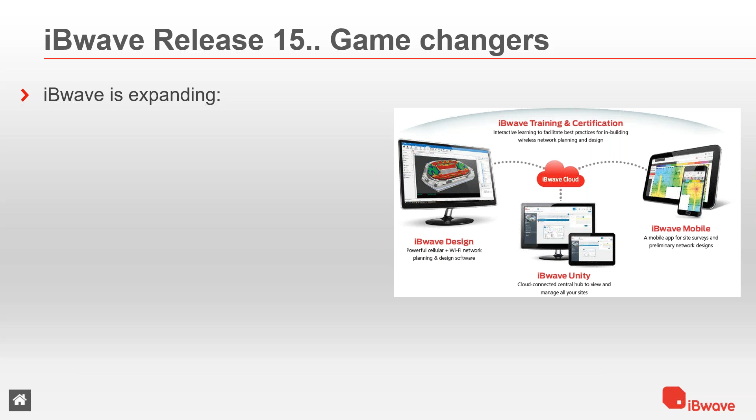But in release 15, we are launching a number of other products. So we are expanding, and this might be of interest for you. The first one is the subject of today's webinar, which is public safety. This is where you can plan, design, and propose public safety networks for the governments or companies you may be servicing.

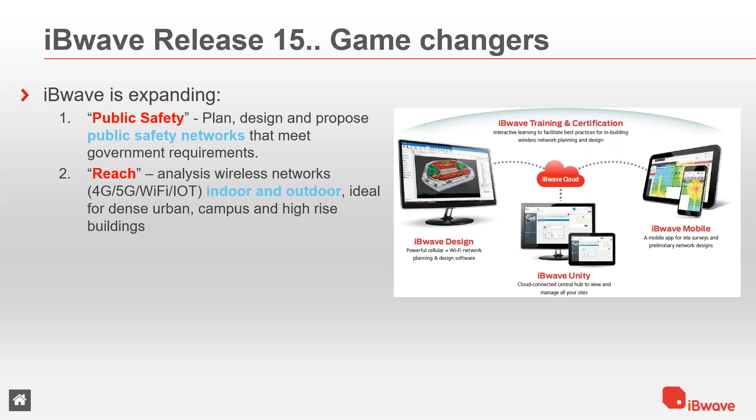The next product, which we can follow up in later webinars, is Reach. This is the first time iBwave is going outdoors. Not only do we design for indoor, but you can also design indoor and outdoor to take into account pollution or coverage from macro or small cells outside the building. It's more of a cellular Wi-Fi IoT solution, but it's very exciting for those designing dense urban networks, campus networks, or high-rise buildings where you have different interference and coverage at different heights. I encourage you to try this out, because I've been waiting for this myself for a long time.

Survey is the other one we're branching out into. iBwave traditionally has been a design product, but as of yesterday, we're moving out into outdoors as well as surveys. For the first time, you can do design and measurements within the same product. You can go onto site, draw a floor plan, take measurements, and do the design all on a tablet in one shot. Again, I encourage you to try this out.

It's really exciting. The last one to mention for this release is Uplink. This is the first time - traditionally, most of our design has been focusing on the downlink, which for the first users of the internet has been more for consumption of whatever's on the internet. But now that we've got Internet 2.0 and even 3.0, we are focusing on both uplink and downlink, because posting videos and so on is just as important as receiving them. So it's good to design the network to make sure it works in both directions.

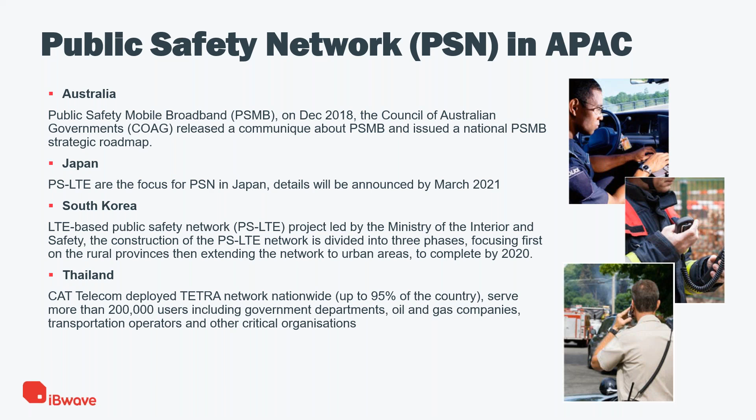So how about iBwave? What is the iBwave public safety solution? iBwave has a dedicated version of software called iBwave Public Safety. It's actually focused on planning, designing, and proposing public safety networks that meet government requirements. Overall, iBwave provides a suite of products and trainings for planning and design, aimed at public safety networks.

The first one is iBwave Unity. It's a data sharing platform, a cloud solution to allow us to share the design and planning of the buildings, and to allow the project manager or higher management to understand the progress of the project itself. Unity is also able to share within government agencies to allow them to download and know the project compliance.

The second one is iBwave Public Safety. This is the major product I'm going to demo and talk about today. It's installed on our PC to allow us to do planning and design.

Last but not least is iBwave Mobile. This is a mobile app installed on an Android-based tablet or even a smartphone, allowing us to do walk tests and data collection. The latest version allows us to do single band cellular surveys, since public safety may only operate on a single band, maybe 450 or even 800 or 900. And it's able to integrate with third-party collection tools. So this is the family of iBwave public safety solutions.

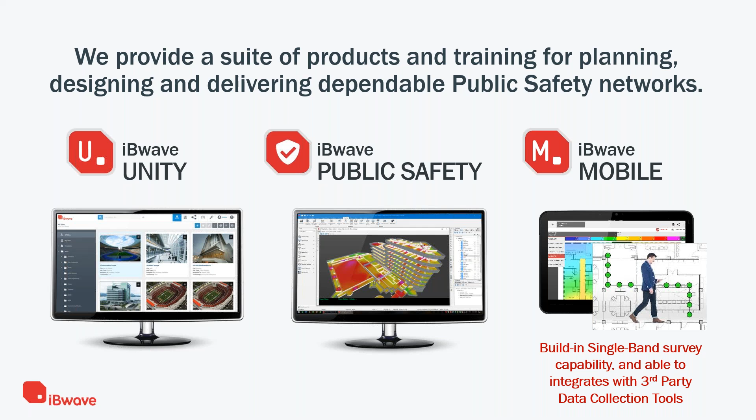We continue to: what are our considerations for public safety? What are the challenges and the things we need to overcome when doing public safety design? Basically, public safety networks, especially in-building, always run on low frequency, such as 450 or 800, be it running on TETRA or LTE.

Generally speaking, large buildings of more than 20,000 square meters might require a dedicated public safety system inside the building. For smaller buildings, it's quite okay because at 450 or even 800 the penetration is quite good. However, the newer materials used in buildings might be different, and there's a high chance that new buildings might require a dedicated public safety system inside.

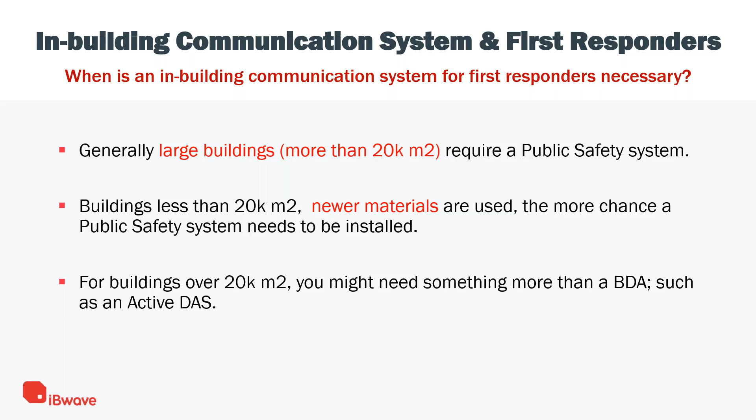For very large buildings, maybe over 20K square meters, a repeater or bi-directional amplifier might not be enough, so another option is active DAS. Among all the public safety networks we have designed, they can be split into passive DAS and active DAS. Passive DAS is dominant in public safety networks, with about 80% of the market share.

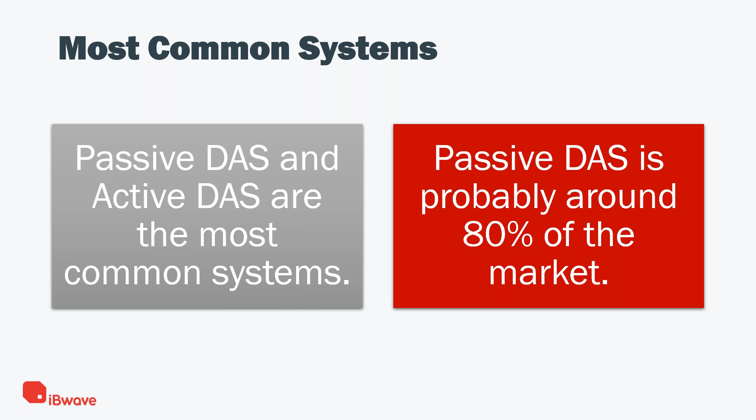So what is the challenge for public safety networks? As we mentioned, public safety networks need high availability and reliability because this is a life-saving network. Within the building, there may be different government requirements for different areas, such as a general area and a critical area. So how are we going to design this and meet the QoS and coverage requirements?

The second is, if you are using a repeater or bi-directional amplifier, how are we going to reduce the cost of the network? How are we going to know the radio interference, especially from the bi-directional amplifier? And how much power do we need to amplify in the BDA? These are all challenges that the designer faces.

Last but not least is how to ensure proper documentation. Especially for public safety networks, the government may have different requirements, and documentation is very important. Documentation also relates to maintenance and future upgrades. So these are three big challenges for public safety networks. Next, I would like to talk about how iBwave addresses all these issues.

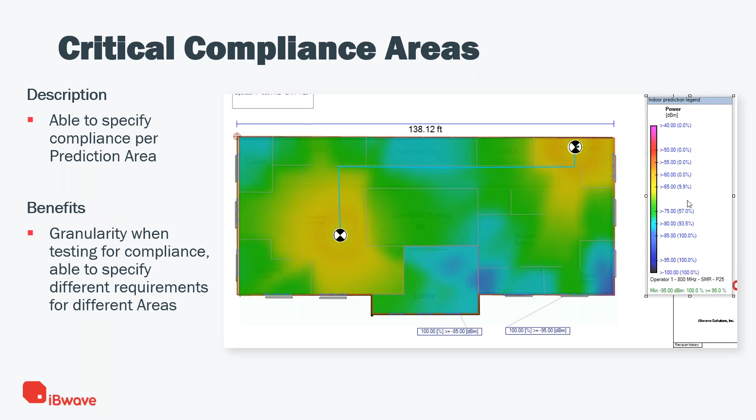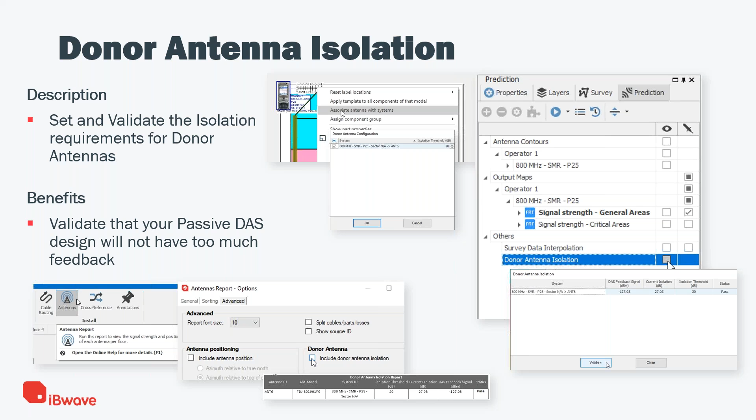The last is the report. iBwave Viewer is a free utility you can download from the iBwave website, especially for government agencies, project managers, building owners, or construction crews. It's able to validate whether the design is compliant and speed up the approval process. The report they're able to view from iBwave Viewer is not 2D. You're able to view in 3D to see the entire design plan, the schematic, and the floor plan.

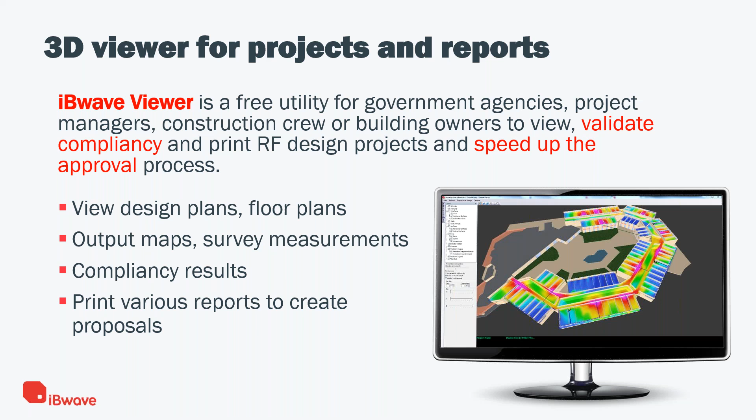And inside the iBwave Viewer, we can include the survey measurements or all the different output maps. We can check the compliance result. Even in future, when the report requirements change, we can use the iBwave Viewer to select what report we require and print out various reports and customized reports for our management or for the government. Okay, now it's time for the demo.

Okay, when we open up iBwave Design Public Safety, this is the interface. In the center window here, you can see there's a startup page which allows you to navigate to new projects, open an existing project, or a quick link to our component database, which Damien just mentioned. It has 34,000 components inside, or even to My iBwave portal, which lets you see various training videos and webcasts, and join our iBwave blog.

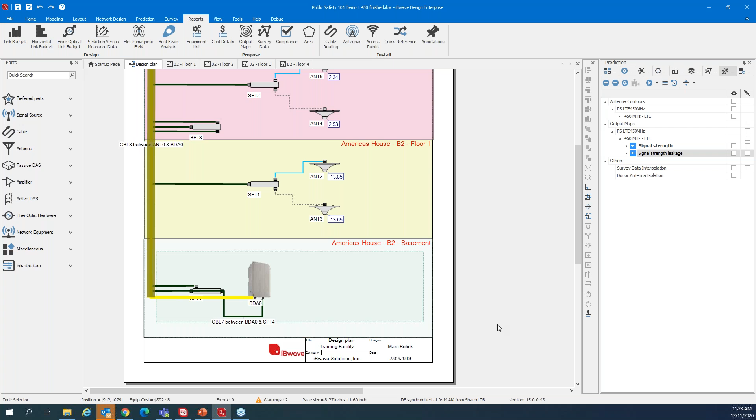The second page we can see here is the design plan, the schematic. Here we can see the design for the entire building from the basement up to each floor, and we can configure a different color for each floor, or just configure the same color for all floors. How the antennas connect, how the system connects, will all show here. The brown color here represents the riser connecting up to each floor. And iBwave will automatically create the riser for you when you connect the cable between floors.

Coming up is the floor plan itself. iBwave is very easy and supports all different kinds of floor plans. We can support AutoCAD, we can support PDF, we can support even picture formats. So it's very flexible. After we import the floor plan, it allows us to easily view the building in 3D.

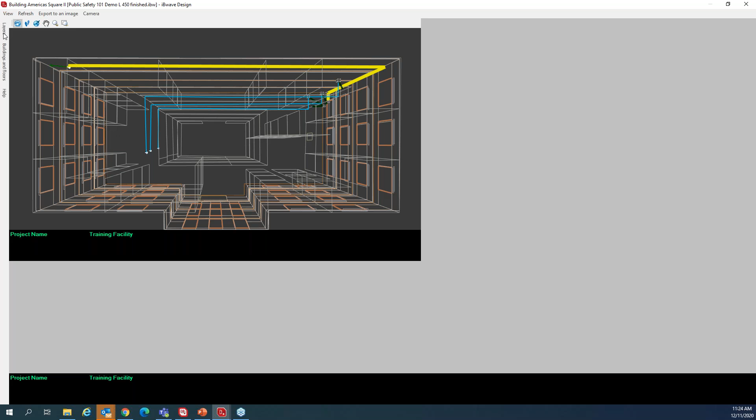And we can see it from different wireframes as well. So the building owner will be able to see clearly how the cable is being connected from each floor and from the riser itself.

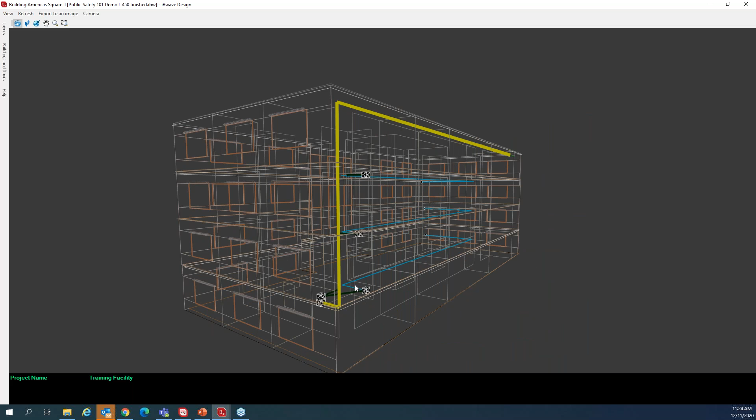Based on what we have just mentioned, the first one is actually the critical compliance area. So for the critical compliance area, I'll be able to design the floor plan with different compliance requirements, such as the signal strength. So what we can do is, from the general area, we can set the compliance area directly on the output map requirement. So from here, I actually set the requirement minimum as -90 dBm, and the target area is 95% coverage. So this represents the general area.

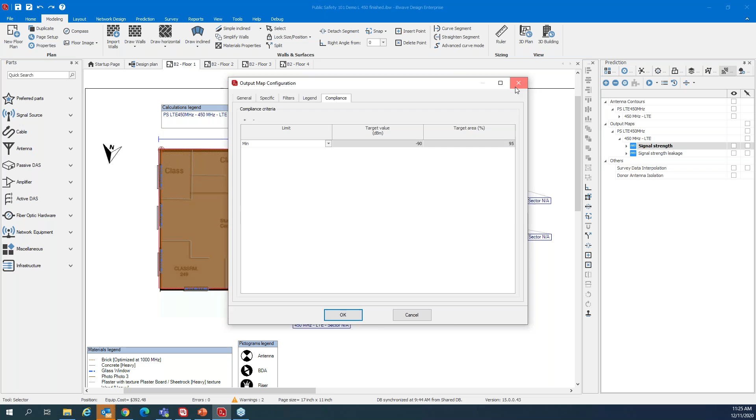But how about the critical area? Something like the emergency exit, the control room, and the lobby. So we can set these different areas to different requirements. So for this demo, I will set these areas: the control room, the emergency exit, the riser area, and also the lobby as critical areas. For demo purposes, I will set the areas to different KPI requirements. To set the KPI requirements, we go to compliance area.

For this particular area, I need -95 dBm with 95% coverage, which is a much higher requirement than the previous one in the general area. And especially for this lobby, I'll select a higher requirement as well. I'll set -60 dBm with 100% coverage for this specific area.

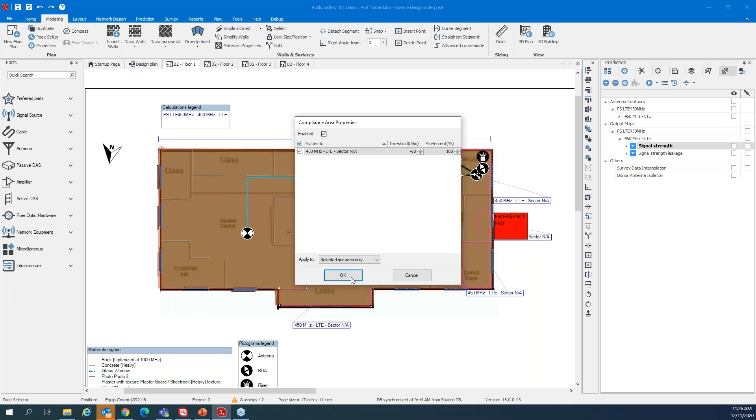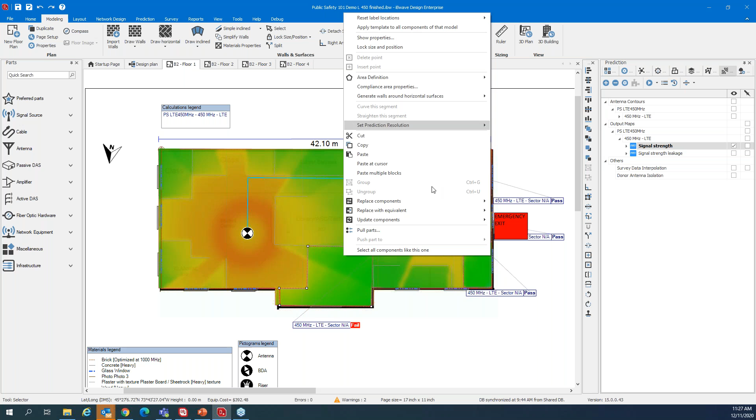So what we can do is run the prediction and see what the prediction tells us. The prediction tells us that the general area actually passed. And for these three areas, the requirement of -95 with 95% coverage passed as well. However, the requirement for the lobby area, which I required -60 with 100% coverage, actually failed. So from this, we're able to know whether we want to add more coverage here, add more antennas here, to meet the requirement.

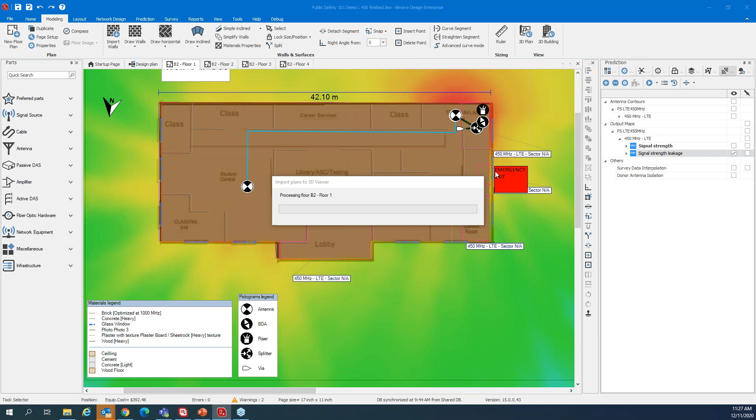The second one is, other than signal strength inside the building, we're also able to see signal strength leakage from the building itself. So from here, you can see how the signal strength travels out from the building. And we're able to see it from the building 3D view as well. Also the 3D view for the in-building. You can see the coverage for each floor.

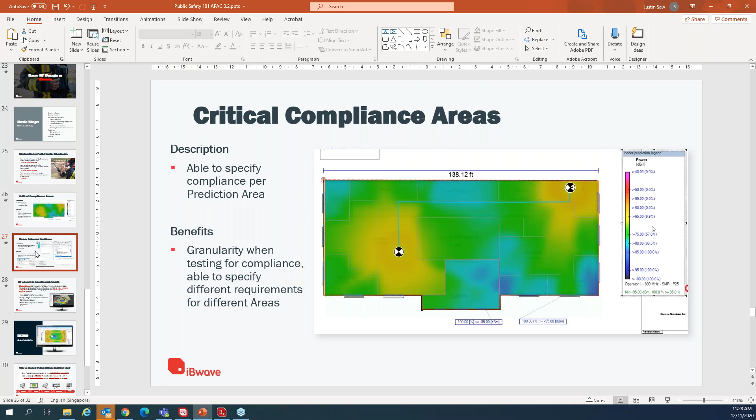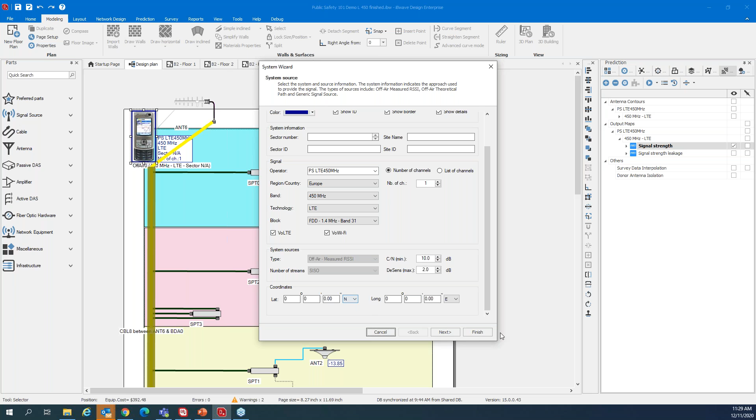And we have another option here, which is coordinates. This allows us to key in the coordinates for the location where we measured the signal. After that, we can key in the measured signal, 60. Then we can ask the Yagi antenna to receive. The antenna receives the signal through the associated antenna system, which allows us to connect to the 450 LTE public safety network. After you connect all this to the bidirectional amplifier, we can see how the signal connects to the BDA.

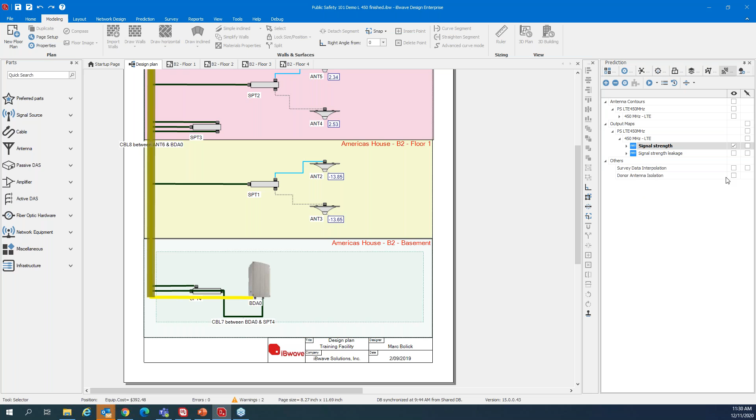So to do donor antenna isolation, we can click here and ask the system to help us validate. You can see that my requirement is 20 dB isolation. You can see here that it actually all failed from the second floor and above. A big reason might be that I set too high a BDA gain, 60 dB. So I might need to change it lower.

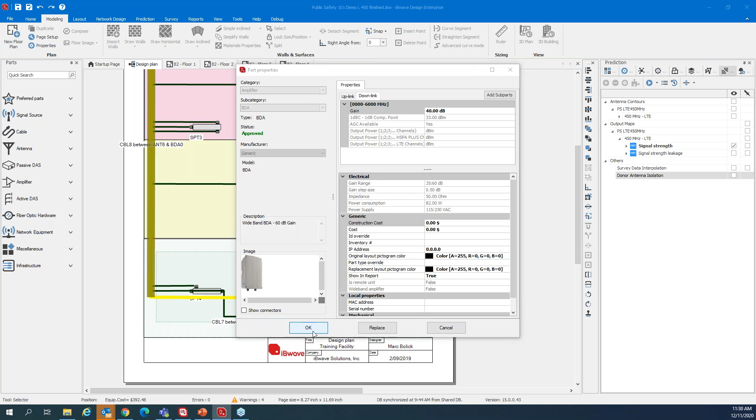I change it to 40. After I change it to 40, I click again and ask the system to validate again. Then we can see that the requirement is met; they actually have 20 dB isolation.

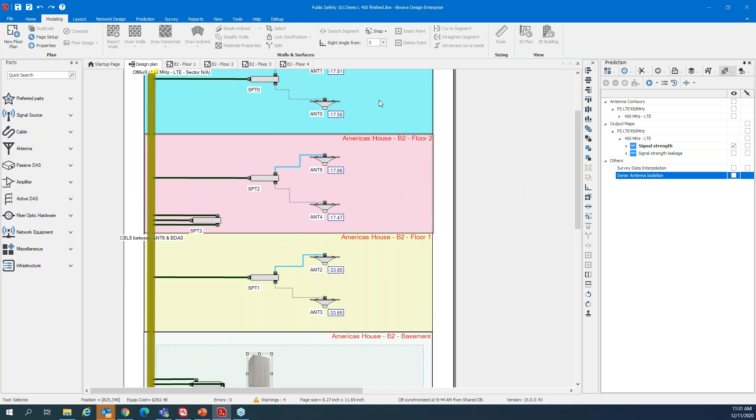And the next very important point is we need to balance out the composite power from all the antenna points. You can see that it's quite different from the third floor to the first floor. The first floor has very low composite power. So what we can do is, iBwave has automation tools. Under the automation tools, there is splitter balancing. Most likely this unbalanced power is because the splitters I chose are not balanced.

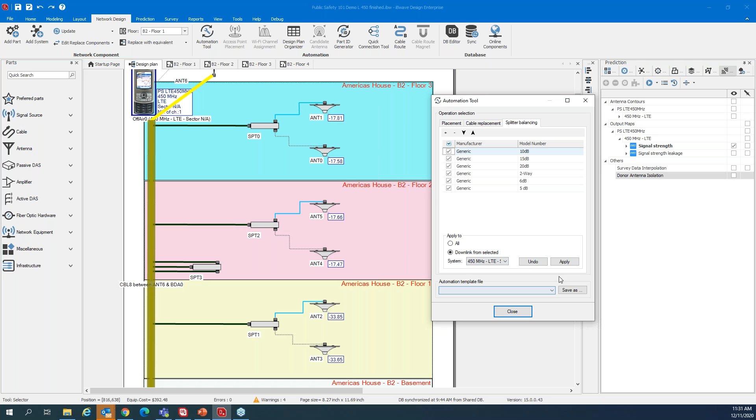So what I can do is add in all the splitters that I have in the system that I want to place. Then I ask the system to help me balance the output composite power. I press apply, and you can see that now it's quite balanced. Among all three floors, it's about negative 18. And it helps me change to the proper splitter for this system.

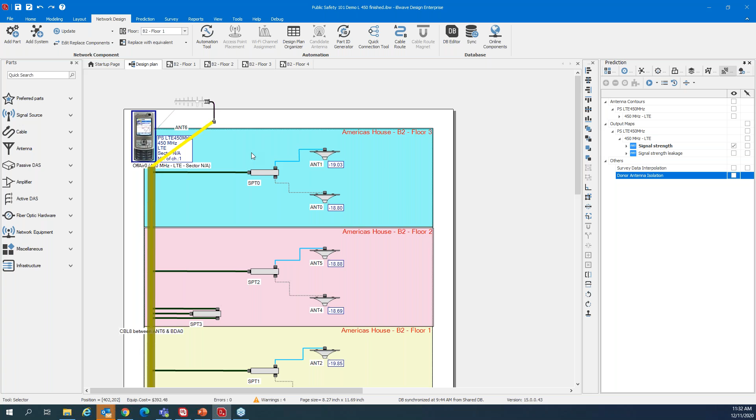The next one is actually how the project outputs the report. So under the top row here, there's a tab called Report. Under the report itself, iBwave has various different reports, such as equipment list, the cost detail, the output map, the survey data, and compliance, or even link budget. So today I will talk about compliance.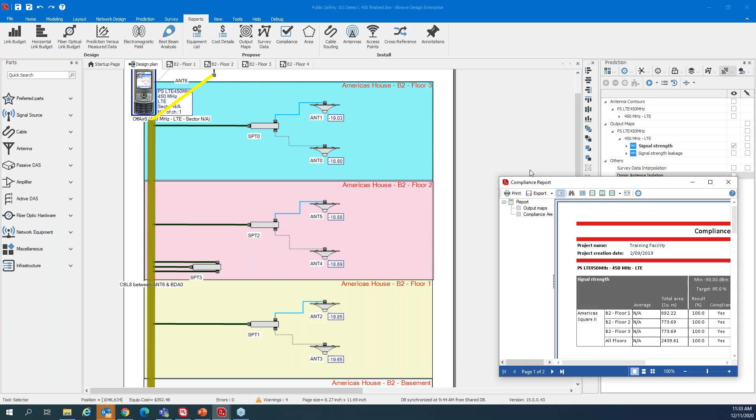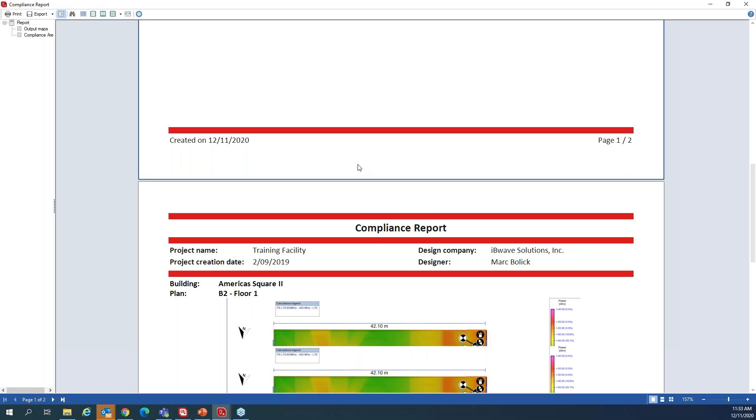We actually will output a certain report, something like this. From this, we can see that the total compliance for the general area actually all meets the requirements. I'll make it bigger. Then how about each different critical area that I've just set? So you can see that these are the 4 critical areas for compliance that I have just set.

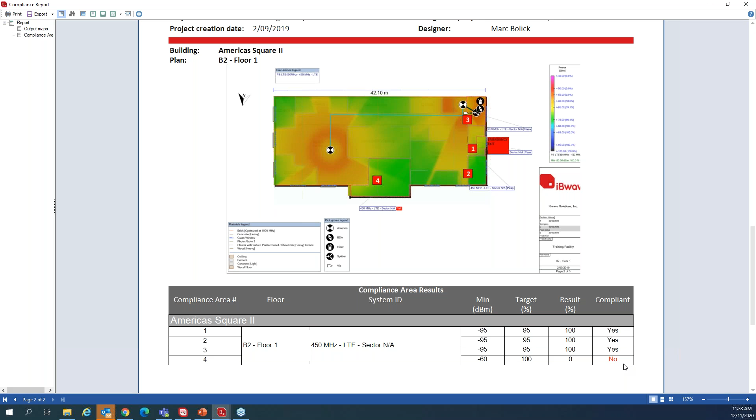So you can see it will show us which area is not compliant, so from the designer's point of view, if there are a lot of floors, it's easy for me to know from this report which floor is actually not compliant, and I can address the issue immediately. All the reports are able to export to different formats: PDF, HTML, Excel, PowerPoint, or even image file.

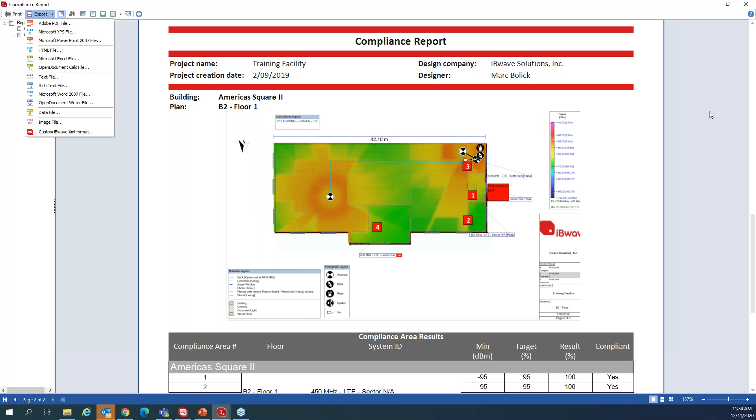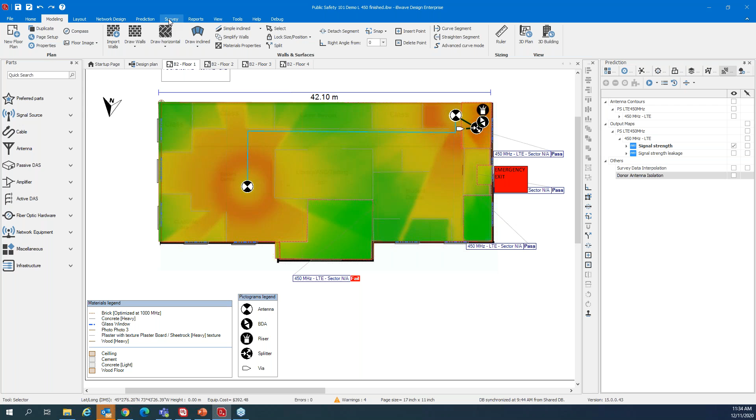So that's why the iBwave Viewer allows the building owner, or even the agency, to see clearly how the coverage is per floor. Exactly the same on this. The iBwave Viewer can see the difference in 3D mode, and how the cable is running. And if the report requirement changes, the iBwave Viewer can also output a different set of reports to allow us to customize into different kinds of reports.

Strength for each floor. So anytime the requirement changes, it's able to output to different formats to allow us to update the report separately.

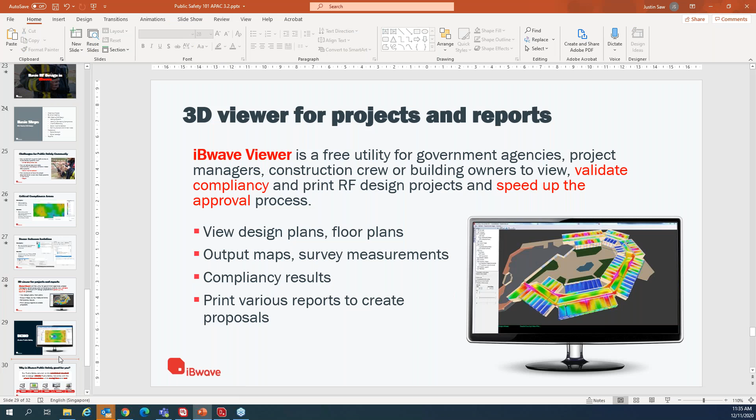So, why is iBwave Public Safety so good for you? iBwave has an entire ecosystem, ranging from survey, pre-survey, where to install, and even the frequency survey. Then all this connects together with iBwave Unity, and allows the designer in the office to use iBwave Public Safety immediately after the person has surveyed the location. And they can download the file immediately in the office.

After that, the designer is able to design and plan it on their PC, and the data is able to transfer to Unity and allow iBwave Mobile, the constructor or the SI, to build the network in the building. All the information such as as-built will be stored in iBwave Unity, and this information will be open to authorized persons with iBwave Viewer to open up the report and for future expansion purposes.

This is a standard. iBwave Public Safety is a solution to establish a standard tool to design reliable public safety networks with proper documentation, saving time and also cost.